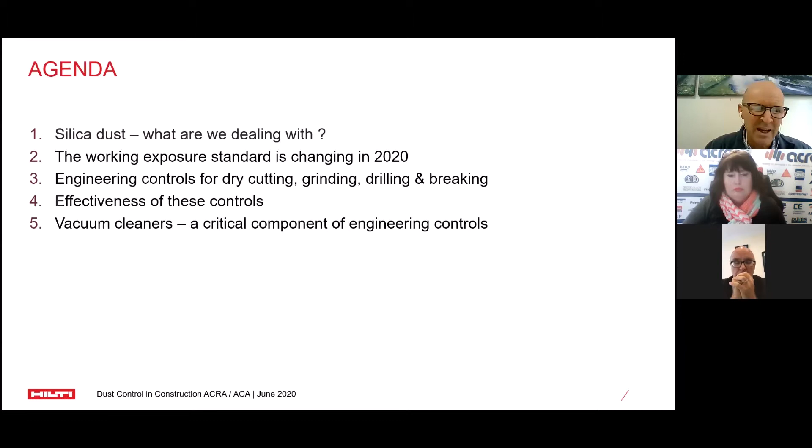So what are we dealing with? Well, silica really as an element comprises nearly 60% of the Earth's crust, and in its crystalline form, it's really hard. Crystalline silica is effectively quartz. Quartz in German means hard. And that's exactly what it is. It's just a very hard crystalline particle.

And here's some scanning electron micrographs of crystalline silica particles found in Sydney sandstone, where my mouse is hovering. And then we look at them when they're in aggregate form in concrete. Now, really what happens when you disturb these particles, they just stay angular. They get smaller as they get broken down their cleavage planes. They stay angular and they just get smaller. It's really as simple as that, but it's really interesting to see what they look like physically.

Now, you can imagine what happens when these particles get into your lungs. In the respirable range, your lungs don't want these particles in them, and your lungs struggle to dissolve them. So when your lungs start to try and dissolve them, they get surrounded by small particles called macrophages. And when the macrophages discover they can't dissolve these particles, they die. And they release an enzyme which scars the lung tissue. And the accumulation of that scar tissue results in the lung stiffening over time.

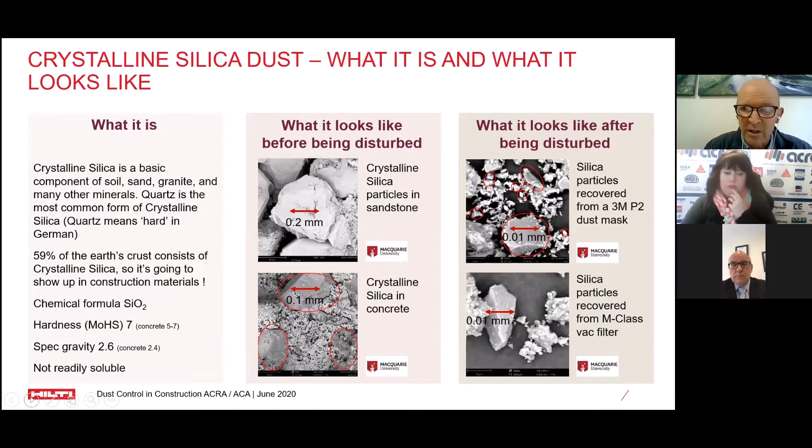And that eventual condition is known as silicosis, which has a range of severities depending on time of exposure and the sheer concentration of particles that you breathe in. But it's also being linked as time goes by to more and more autoimmune diseases, and it's also quite closely linked to obstructive pulmonary disease. So it's not a good thing to encounter, and it's an important occupational health topic to tackle, particularly as we experience a workforce that stays longer in construction, and particularly as we increase retirement age.

So because it's everywhere in the Earth's crust, you find it in all materials in construction in varying percentages. Clearly the worst candidate is engineered stone, but in concrete, which is really the form that we're in today, anywhere between 5 and 40% of the material can consist of crystalline silica.

And workers get exposed to it in 2 ways. Firstly, when you disturb it through cutting, grinding, drilling or breaking concrete. And then if you haven't controlled that dust at source, it settles, and then it can be redisturbed when you try and clean up or when you drive over it and walk over it. So you can be exposed on 2 occasions.

Another consideration, particularly in the remedial space, when there is a lot of cutting and a lot of grinding, is the question of aerodynamics. These particles, when they're in the respirable range, less than 4 micron in diameter, take a long time to settle. So a 1 micron particle can take several hours to sink just 1 meter, which is quite scary because we all know what workers do when they are machining.

They might have a mask on, and as soon as they finish drilling or whatever they're doing, they pull the mask off. But in fact, you might well still be exposed to the cloud of dust that is floating around, even if it's not visible to the naked eye. So that's one careful thing to remember. When you've got controls in place, they need to stay in place.

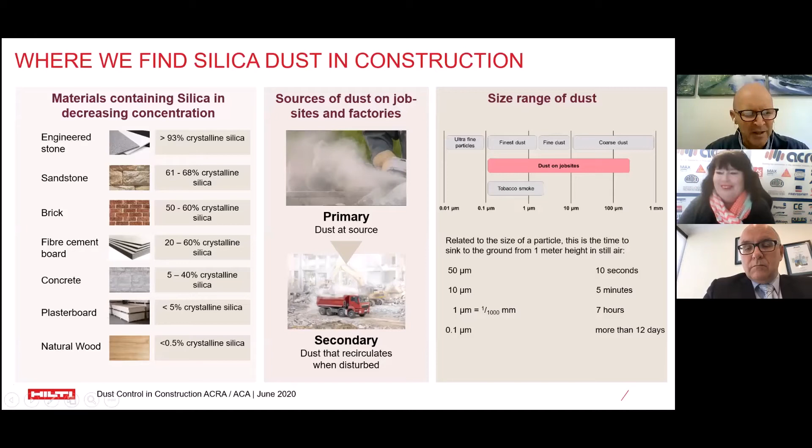Now, as we know, the exposure limits are going to be changing as of 1st of July, as I mentioned in the intro. But before I get to what they change to, I want to give you an idea of the magnitude of the problem that we're looking at.

It's pretty scary. If we look at a typical construction application, whether it be grinding concrete, cutting concrete or masonry, or heavy drilling or breaking, a lot of dust is generated, but I don't think many of us take the time to actually measure that or think about that in a kilogram format.

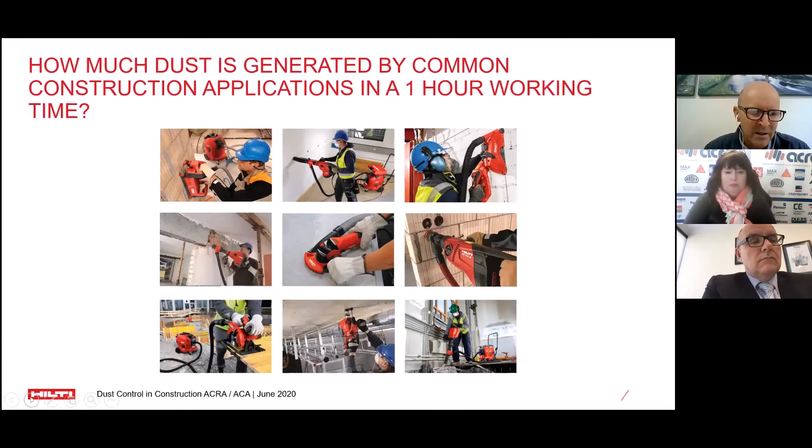So I'll just superimpose the levels of dust generated in these operations over these photographs. When we're looking at concrete grinding, even with a 5-inch grinder, we can liberate up to 3 kilograms of dust per hour. I think we probably have an intrinsic feel that that's true, because when you look at the cleanup operation after grinding, if it's been done without any capture equipment, there's a lot of dust that gets swept up.

Diamond cutting with the 9-inch cutter is even more, and this is a really difficult dust situation to control. It can liberate up to 12 kilos of dust per hour period for continuous switch-on time. It's a very significant problem.

Now let's turn this picture into the concentrations of dust that this can result in. And when I say concentrations of dust in the respirable range, i.e. less than 4 microns - that's dust that you can breathe right into your lungs.

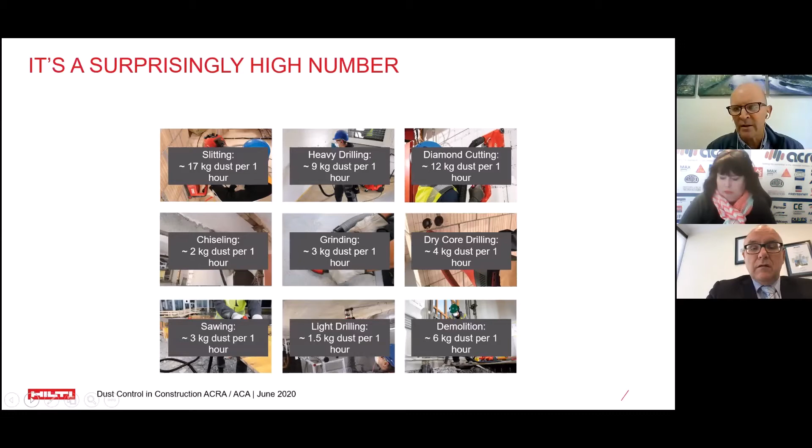So I just did a literature search over a range of different studies to get an idea of what this can look like, and later on we can compare it to some of our in-house tests. When we're looking at just concrete grinding, we can see a dust concentration of 0.83 milligrams per cubic meter over an 8-hour weighted period.

It's a very high concentration of respirable dust. The silica dust would be a fraction of that, so your silica dust concentration would be less, but still even this number is way higher than the new working exposure standard of 0.05 milligrams per cubic meter. So this is with no capture in place, just spewing out into the environment.

Cutting is even worse, at a level of 1.6 milligrams per cubic meter. Again, many orders of magnitude higher than our future working exposure standard. I think that kind of puts some boundaries around the challenge that we're looking at within the construction industry.

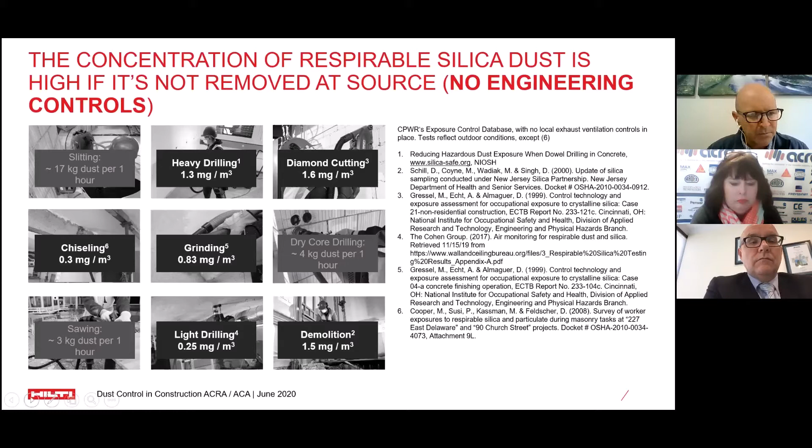Now, with the exposure standard changing, it's going to require fairly significant change in behavior. When we look at these machining operations relative to the old standard, when you put these operations in place with control measures, and you wear protective equipment like a face mask, which would have a protection factor for a P2 mask of, for example, 10 times.

In many of these operations, you'd be in the clear. So, for example, grinding, you could get to a lower concentration than 0.1, breaking a very low concentration, even light drilling. But still, diamond cutting is a major risk factor, and there you would be needing to look at wet cutting, even in the context of the old working exposure standard.

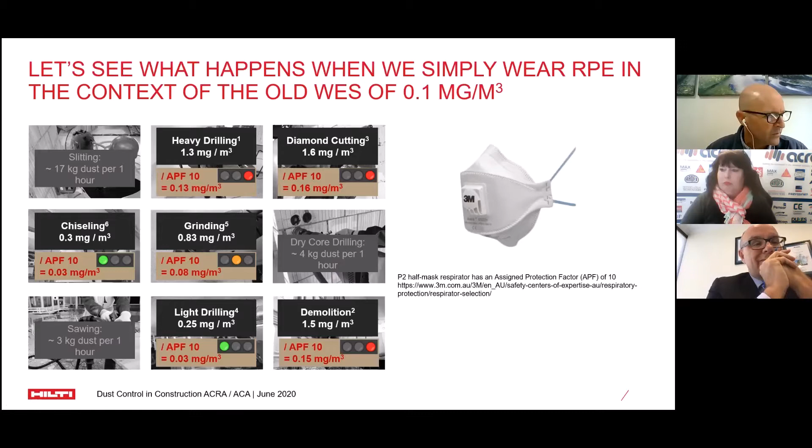So this is a kind of situation where we need to look very carefully at what engineering controls to attach to these types of operations, and then use in conjunction with protective respiratory equipment, for example face masks, so that we can finally control this.

So we're in a completely different space in the industry. We have no choice really but to widely adopt engineering controls for capturing dust - that's assuming there wasn't a substitute. But for the purposes of this discussion, I'm assuming, because we're talking about remedial work as opposed to ground-up construction where you can do substitution, that engineering controls is really the direction in which we need to be heading.

So this is another point at which I can pause for questions regarding the new exposure standard and its impact on how we work in construction, and see if any questions have come up. Nothing has popped up. Does anybody have anything they want to say verbally? No, okay good, that's good. You're answering all the questions.

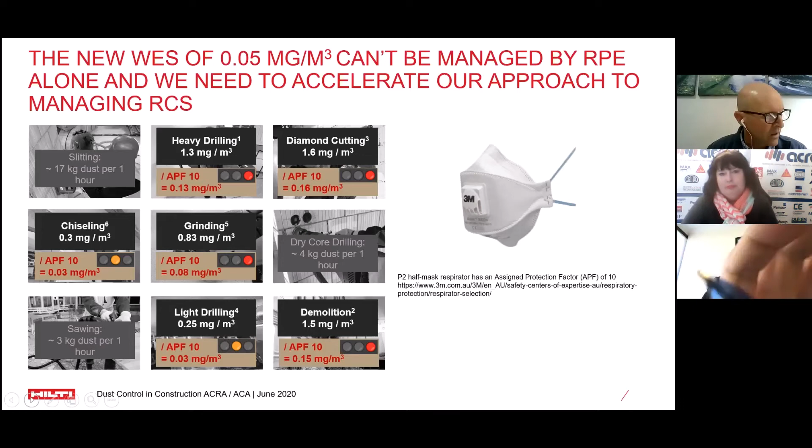Right, well, now we'll get into the very interesting stuff, which is what are the engineering controls? And then very importantly, what impact do they have? How effective are they in reducing the overall concentrations to a very low level such that we can safely work within them? I'll run through a few.

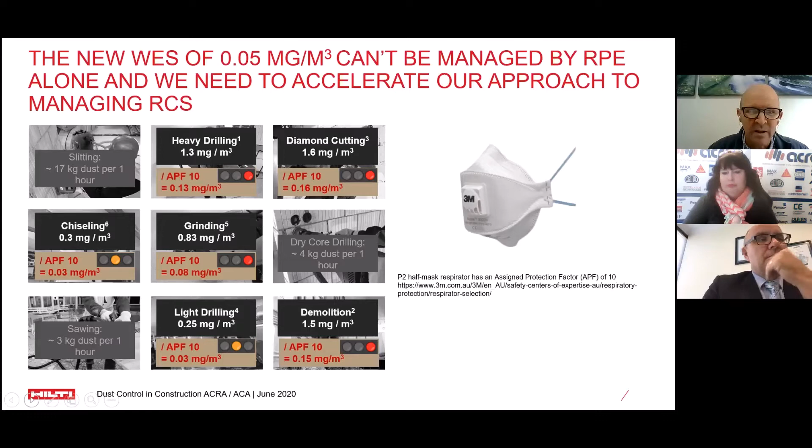The typical engineering controls that we can attach to concrete cutting operations are very simple hoods that can be attached to small grinders, and then the more sophisticated wet and dry specially designed cutters, electric cutters, that have got a shroud that can suck up dust if it's being used dry, or you can attach a continuous stream of water if you're going to be cutting wet.

The critical element in the dry cutting operation is the vacuum cleaner. All of the WorkSafe bodies within Australia recommend either an M-class or H-class vacuum cleaner for use in construction. WorkSafe bodies in Queensland and New South Wales pull back on that. WorkCover in Queensland now have an official practice document for working with artificial stone, and there they specify an H-class vacuum cleaner. But for general construction activities, an M-class vacuum cleaner suffices. That's a critical link in this - a well-maintained and fit-for-purpose M-class vacuum cleaner is the thing to be using.

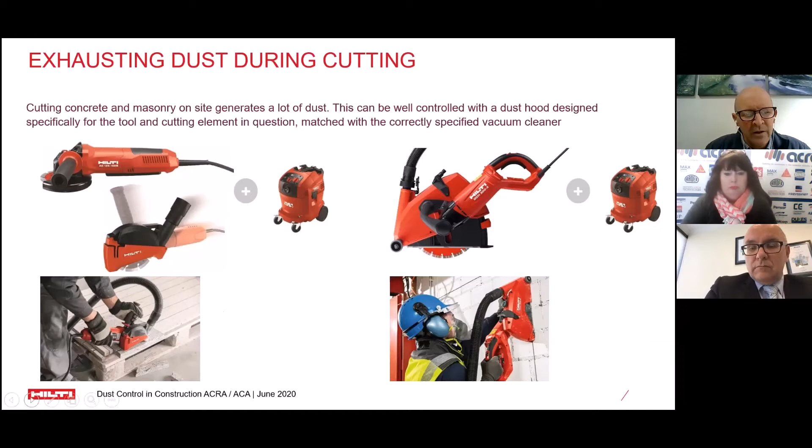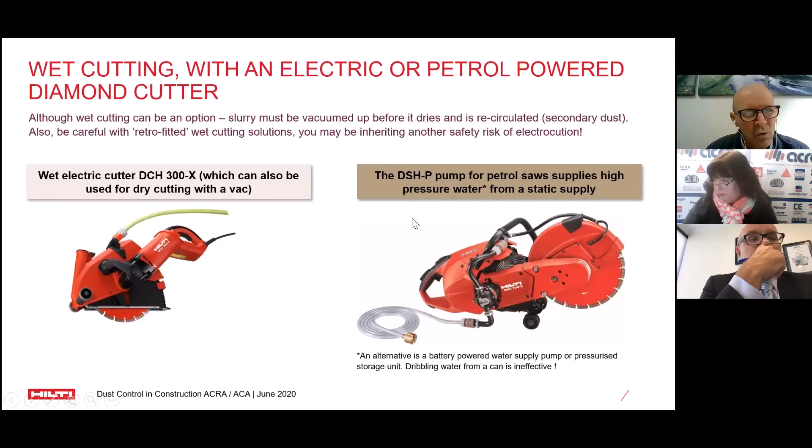The next engineering control we can look at is fitting turbo pumps to petrol-powered saws. So instead of just using a gravity flow of water to try and suppress dust, we're able to attach pumps to the tools such that you pump water onto the blade at a very high pressure. Pumping water onto a blade at higher pressure enables better adherence of the dust particles to the water particles to generate a more effective slurry. So the actual dust concentration isn't as low, because you don't capture all the dust with wet cutting, you only capture part of it.

Also in the industry, we're starting to see widespread adoption of grinders with purpose-built hoods. A key part of looking at any particular engineering control for grinding is the interface between the surface of the concrete and the actual hood that surrounds the tool. You need effectively a skirting in place, either with plastic baffles or nylon baffles, and that forms the seal between the concrete surface and the hood itself. If it's just a hood, you still get a lot of dust leakage out from the side. Now, if you are machining rough concrete, which was a question that emerged in the last webinar, clearly you do get some leakage, but still the majority of the dust can be captured in these types of custom-built grinders.

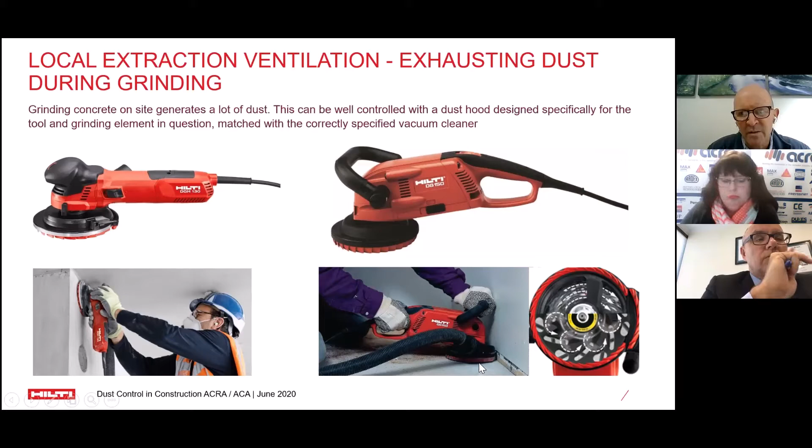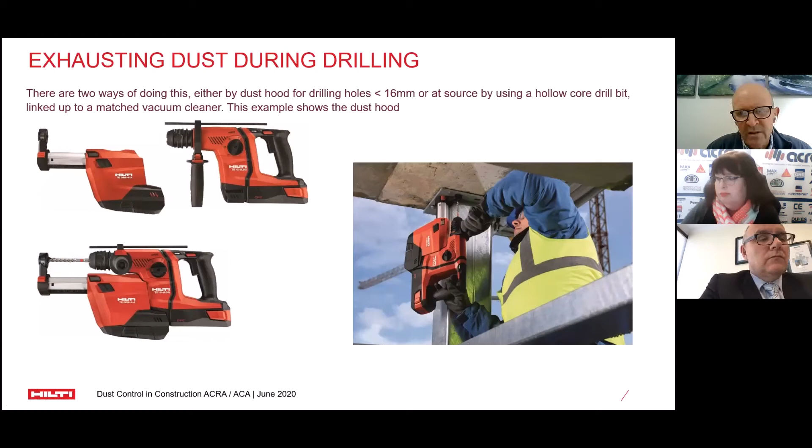On-tool dust extraction for drills is a good method of capturing dust. And then using technology that we're seeing in industry more and more for large diameter drilling is using products like hollow drill bits. Now, the advantage of using something like a hollow drill bit, and the advantage of many of these engineering controls, is when you remove dust at the cutting element itself, right at the tip of the drilling head, you reduce friction of the overall machining system because you aren't getting dust transported up the flutes of a drill bit. So the drilling process is actually faster. Not only are you controlling dust whilst you're drilling, but you're also able to drill slightly faster.

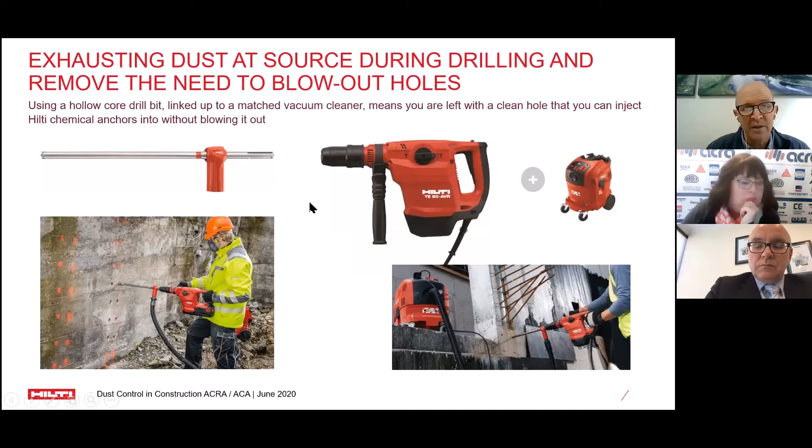The other advantage with using this type of system is that when you're drilling holes to inject chemical, be that a sealant or a chemical anchor, whatever that sealant might be, you're left with a completely clean hole. So you don't need to flush it or blow it out with compressed air, because equally blowing a hole out with compressed air, you get covered in dust. So there are multiple benefits for using this kind of hollow drill technology, and there are quite a few suppliers in the market, including ourselves, who offer this type of technology.

Even with breaking, we can now attach engineering controls to breakers in the form of hoods. Often with breaking it's a very uncontrolled kind of process, and you still see a lot of dust being generated in this particular application. But the dust that's generated is generally in the coarser range, and the fine dust that gets liberated - you still see somewhat of a cloud of dust. But the fines, or the respirable range, are still sucked up through these hoods and recovered in a vacuum cleaner.

There you have an advantage in these kinds of light demolition or remedial works, where if you've controlled that fine dust during operation, the cleanup effort is less, and the surrounding physical inhabitants' complaints are less, because they're not getting dust drifting into their surrounding office buildings or surrounding public areas and that sort of thing. So you're able to contain the overall dust footprint much closer to the machine and to the operator.

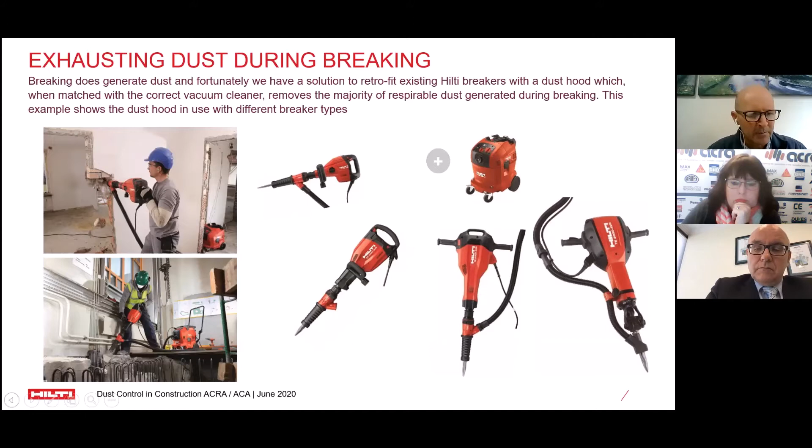Now I'll just run through how effective these controls are. Nick, is there a question there?

There is. Jonathan McRae from Apex Diagnostic has a question about your vacuum cleaners: what's the difference between the two classes of vacuum cleaner? And when we say the two classes, the M and the H, I'm assuming? Yeah, I'm assuming yes.

Well, I'll actually touch on all three types of vacuum cleaners. The one that has been most popular in the industry is the basic L class, which has a dust efficiency capture of 99% through its filters. The M class has 99.9%, and then the H class has a filter efficiency capture of 99.995%. Now, on the face of it, you'd think, well, why don't I just go for the H class?

But the effectiveness of the overall system is a function of the grinding or cutting element you're using, the effectiveness of the hood, as well as the vacuum cleaner. So in terms of dust capture effectiveness overall, there isn't a huge difference between an M class and an H class.

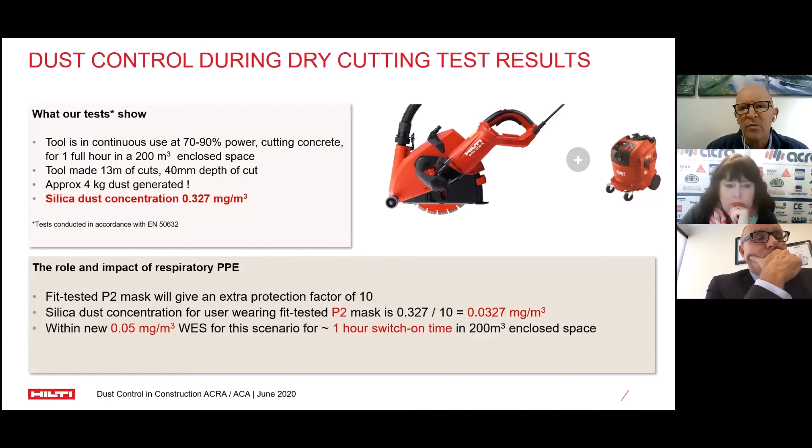So really, in light of the new workplace exposure standards, operators of these types of equipment need to either switch to wet methods to reduce that dust load, or use respiratory protective equipment. With a P2 mask, that will drop to about 0.03 milligrams per cubic meter, so you're working within a safer zone. When we look at concrete grinding, it's a much easier system to control.

Just grinding again in the same standard test in a 200 cubic meter enclosed space with a 6-inch grinder, we got silica concentrations of 0.043 milligram per cubic meter. Now, if we put a dust mask on in that instance, you'd reduce the load on the operator down to 0.004. So again, well within that safe area.

Now, just a word of caution with this kind of test data. It's very difficult to extrapolate this to what an 8-hour working day looks like. So one has to see this in context and interpret what the actual switch-on time is that my operators are experiencing in the workplace. Is it over a full day? Is it 1 hour? Is it 2 hours? Is it 30 minutes? That gives you a better indication of what the concentration of dust might look like. And then one has to put additional factors into place, or is it a naturally ventilated area, in which case the dust concentration reduces considerably as well.

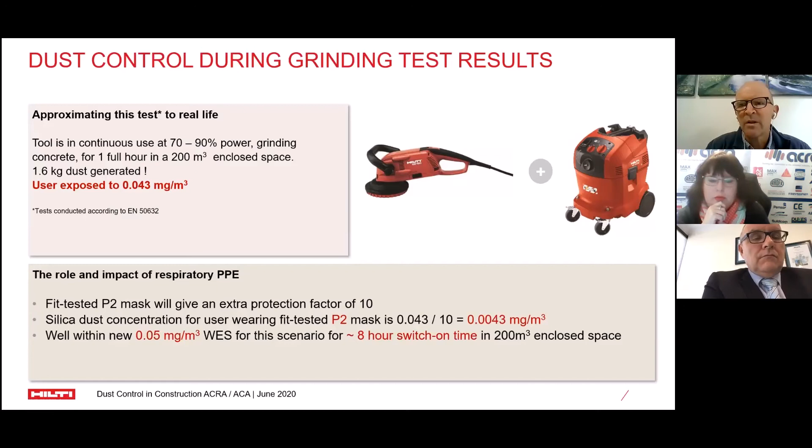But using well-designed grinding equipment with PPE is a very simple process. Well, it's much simpler than cutting, certainly. Much simpler process to control.

Similarly with light drilling, with onboard extraction, here's an example of such a tool, and I think Nick last week showed a few examples as well. The light duty drilling is a very easy application to control, but even without protective equipment, without a mask, you're coming really close to the actual working exposure standard. So even with light drilling, it's a pretty good idea, if it's on a continuous basis over a full day, to be wearing a dust mask.

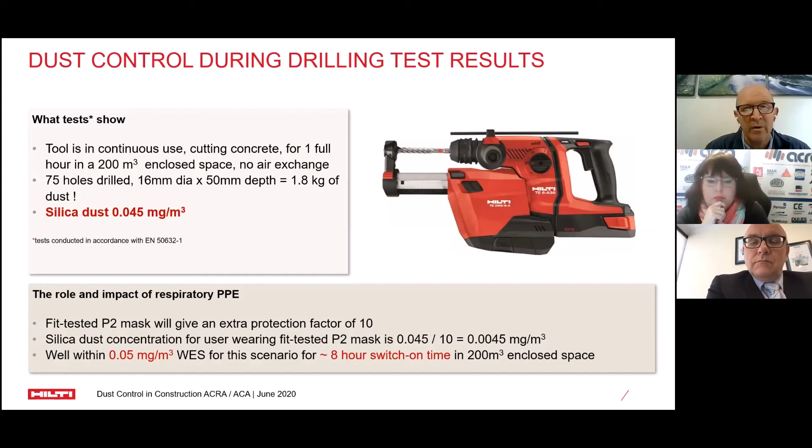Then with the hollow drill bit systems, we are able to stay below the 0.1 kind of mark with this particular test. It was done with a German insurance body called BG Bau, and they don't release the exact data achieved within the test, but they just let you know if you've passed a gate or not. This particular test showed that we passed the gate of being less than 0.1 milligram per cubic meter with a kind of heavy drilling application.

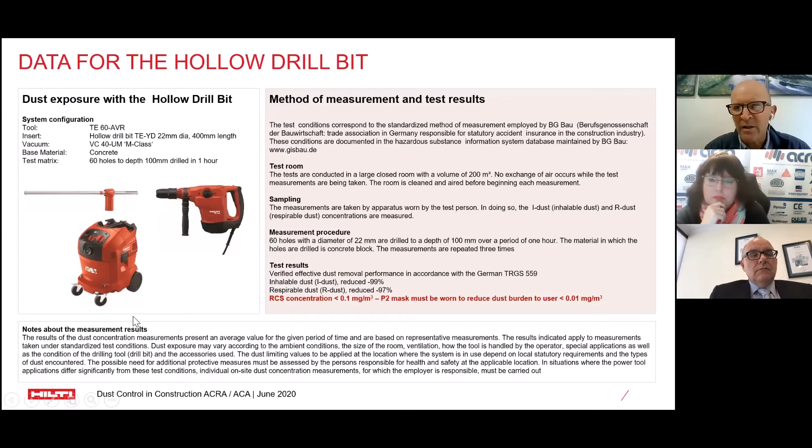So again, pushing home the point that these types of heavy drilling applications, if done on an all-day basis, really need to be done with respiratory protective equipment. And we saw quite a few examples of those last week as well. So either the half face mask or the full face mask, depending on the user.

So now then, yes, this question of the M or the H class vacuum cleaners—what are some of the critical variables that surround the operations, and how often do I need to change filters?

Now, it's a strange thing, a vacuum cleaner in a construction environment, because you see a box and kind of think it's like a tool, and I'm just gonna use it. Honestly, if we look at ourselves in the mirror, how often do we clean the filters aside from emptying the bag in our household vacuum cleaners? It's not real often, but it's a critical element. The state of the filter, regardless of your equipment supplier, has a very strong bearing on the final dust concentration that you would experience.

These filters are made of a woven polymer, and like any woven polymer, they can wear over time, and if you have very high dust concentration, they can become clogged. They can be washed to extend their lives a bit. In most instances, we recommend, if you are maintaining them by washing, they can last up to 6 months, and you certainly need to exchange them at a minimum on a six monthly basis, absolute minimum.

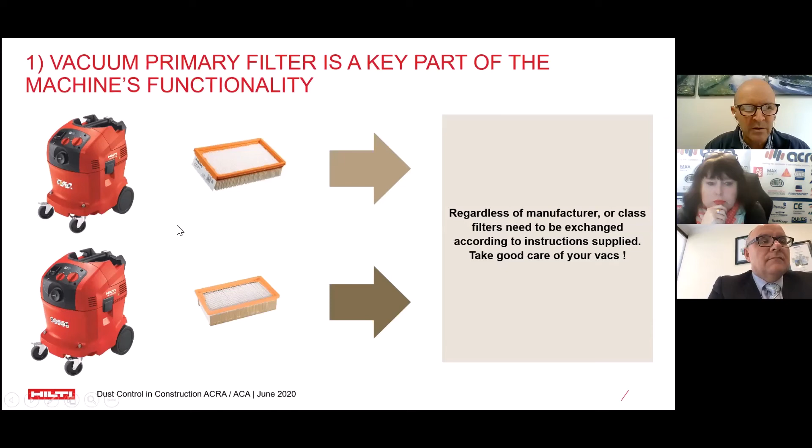Also with vacuum cleaners, a hidden danger, backed up by quite a few studies from principal contractors, is the emptying of them. The laborer who empties them into a skip, if a bag isn't used, just upends them and gets covered in a cloud of dust, which is not good for health at all. So you have the option to use paper or fabric bags that can be closed off and disposed of in a skip.

These things sound like minor details, but they're actually a very important element in your overall mission to reduce dust concentrations on site. You can have on paper all the elements in place - hoods, the right inserts in the tools, the correct class vacuum cleaners - but if the vacuum cleaners themselves aren't in good working order, you're not going to get the health outcome you need.

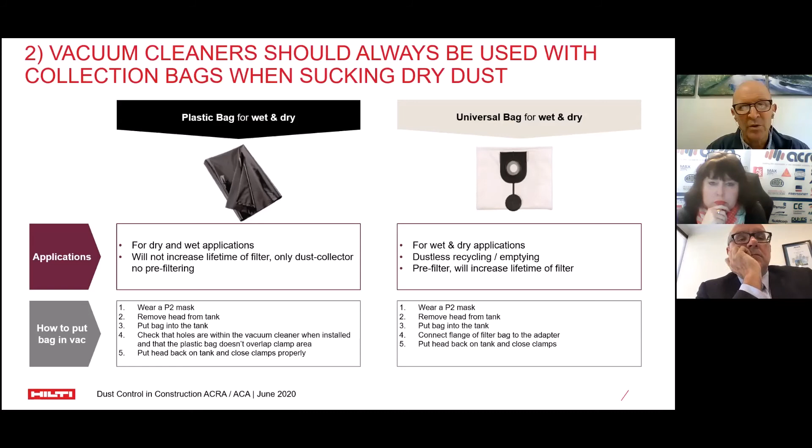As a supplier, we try to do our bit within the whole change management of what's required in the industry space, to educate people about these things - which systems you can use, how to maintain your vacuum cleaners. Our people are always ready and willing to do training within classrooms or on site, because the change management involved in moving from a working exposure standard that was pretty easily achievable using normal construction gear, to this new working exposure standard, isn't all that easily achievable unless you're working with the correct gear and your people have been well trained and are aware of the risks.

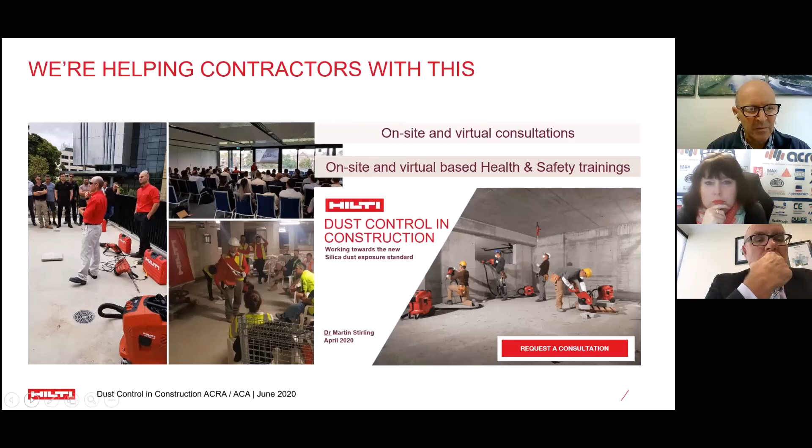So that's all my formal slides, and I'm very happy to take questions at this point.

Are there any more questions? Not yet. What about robotics, Dr. Stirling? Any current information on demolition robots, things like that?

Many of the demolition firms I see are either currently investing in robotics for demolition, for sure, and now starting to investigate - and we're also investigating robotics in grinding.

Much like you see those auto vacuum cleaners sniffing around. But one step before that is making sure machines have the technology to speak to one another. For example, the question was asked: how do you know when to change the filter in a vacuum cleaner? That's easily solvable if you have a vacuum cleaner that can alert you when its filter is clogged - that's technology under development at the moment. Better yet is a vacuum cleaner that can talk to the tool, telling it that it's not working anymore and therefore stopping the tool from working.